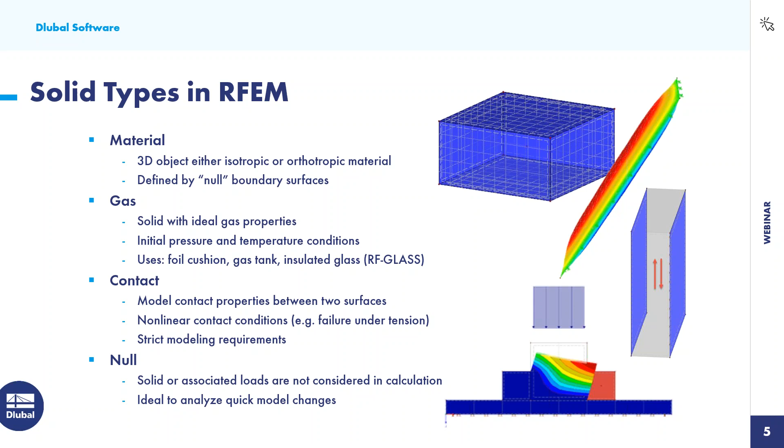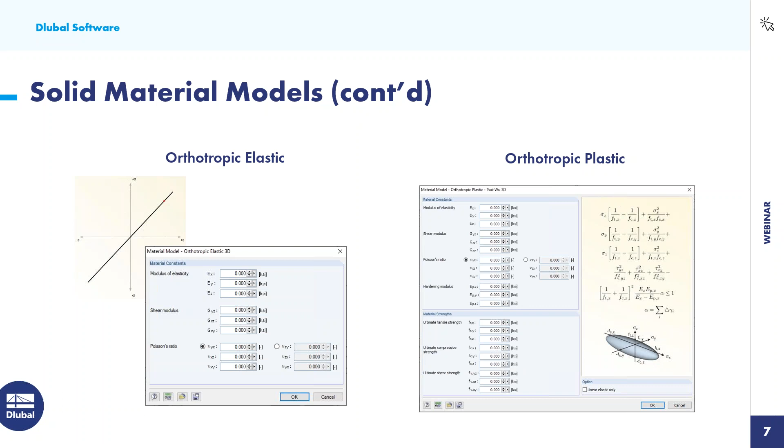Over on the right, we have orthotropic plastic. This utilizes the Tsai-Wu failure theory, and it allows for both plastic and orthotropic properties to be defined in three directions.

All right, so now that we have covered the different solid types and material models, I would like to get started with our first example here within RFEM.

You'll notice that I have a series of line and node elements here, and this model actually comes to us from the firm GP Joule Canada out of Toronto, and they use this type of connection here for their solar racking products. They have delivered me this file as an IGES.

So what I did under File Import, you can see here that we have many different file extensions that we can import directly into the model. We also have some direct interfaces with Tekla, Revit, AutoCAD. These are all default within the main program.

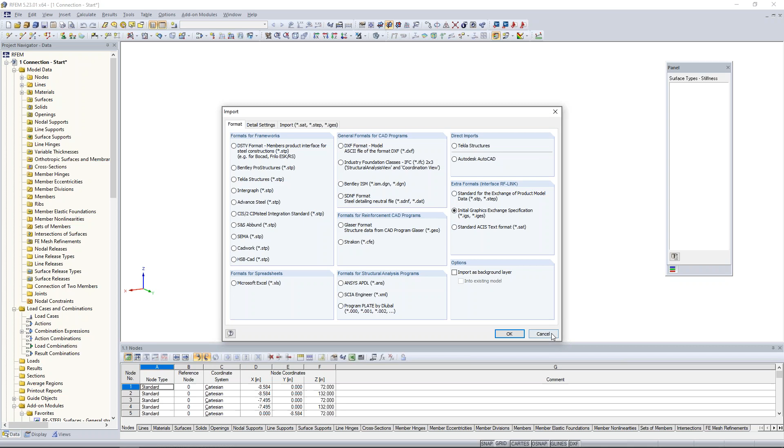If you are trying to import an STP file, a step file, or IGES, you will need to utilize the add-on module RF Link. So for today, we're importing this IGES. We'll use that RF Link, and essentially what will be brought in are a series of line and node elements to help us model these solid elements.

To begin with, we could probably agree that this is a little bit of an odd connection, not really found standard in a lot of connection design. So this might flag us that we'd want to do finite element analysis with solid elements to view the various stresses and deformations within this model.

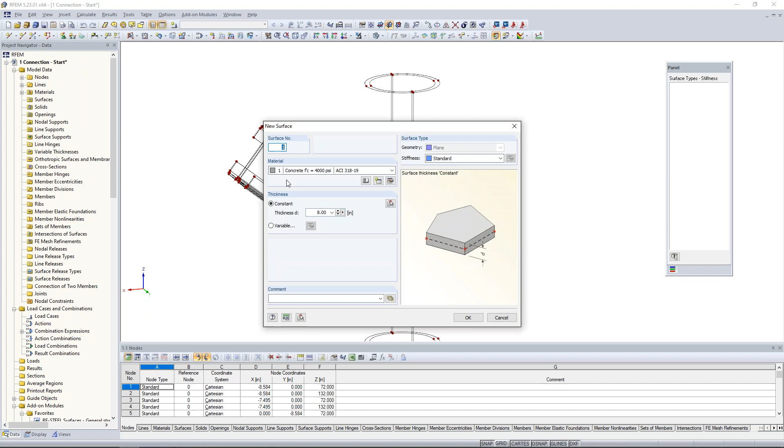So we'll begin by drawing our first solid here. We can see from these vertical lines as well as the circular lines at the top and the bottom that we want to begin with drawing our first pipe solid. I'll go up here to draw a new surface element, and all of these surfaces from this drop down allow us to draw a surface that's in a single plane. So we'll choose select boundary lines, and we're going to set the stiffness to null.

So if you remember back to the PowerPoint, these null surfaces will define essentially the geometry of what will eventually be a solid element. I click OK, and then I can zoom in here to the top of what will be my pipe element, and I'm just going to select these various line elements here to create my first null surfaces.

Now we'll do the exact same thing on the bottom. I'm just going to zoom in here and select all 4 line elements, and we'll do so on the other side as well. As far as the pipe walls, these are not in a single plane.

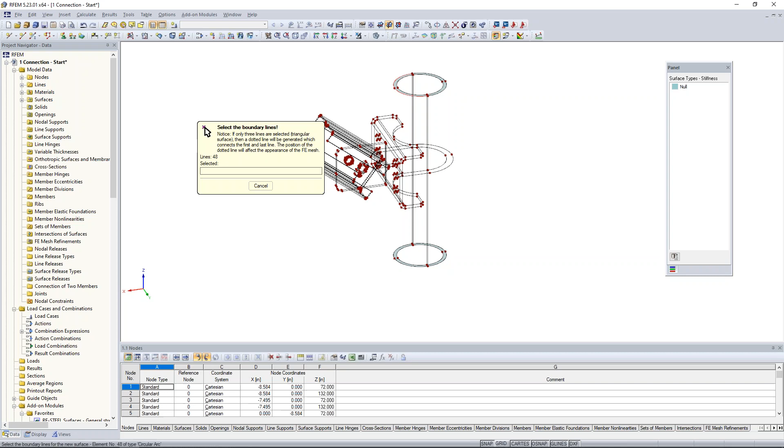So we cannot use this option here to just draw a simple surface, but rather we need to use this tool, a couple over, for a new quadrangle. Now again, the stiffness type is set to null, but this allows us to define surfaces that aren't necessarily in a single plane. So you can see here that I'm going to define my outer wall, and then I'm going to define my inner wall with these 4 simple lines.

Now I can take both of these surfaces here, select them, and utilize my mirror tool.

We can create a copy with the mirror tool. We would mirror about the ZY plane, and then I can simply select any point here within the model that I'd like to mirror about. The coordinates are automatically populated, and now we can see that all of our null surfaces are complete.

So we can define our first solid. Up here in the toolbar, I choose the option New Solid. The solid type will be set to material, so here are those 4 different types that we discussed in the PowerPoint. The material will be accessed from the material database.

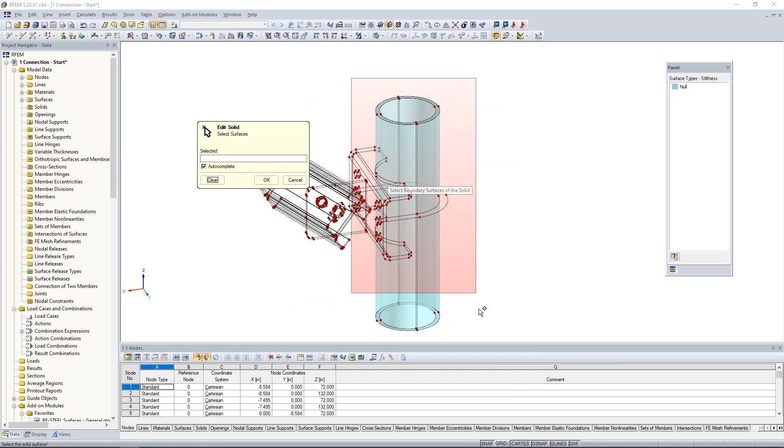I'm going to utilize my filters on the left to choose metal. We'll choose steel, we'll choose ASTM, and we can even take it a step further to choose AISC 360. From here, we would want to choose A53 grade B with the relevant material properties given to us. So I click OK, and then it's really just as easy as graphically selecting these boundary surfaces, surfaces 1 through 8.

Now the other two tabs here, the FE mesh tab allows us to define an FE mesh refinement. We'll actually do this a little bit later on, so we'll leave this unchecked for now. The axes tab will allow us to modify the local axes of the solid. We'll just leave this as the standard default.

So when I click OK, what we'll see here is our first solid has been defined, and we can select it right here in the center of all of these null surfaces. So that was a fairly easy solid to define, but what we would like to move on to is maybe a little bit more complex example.

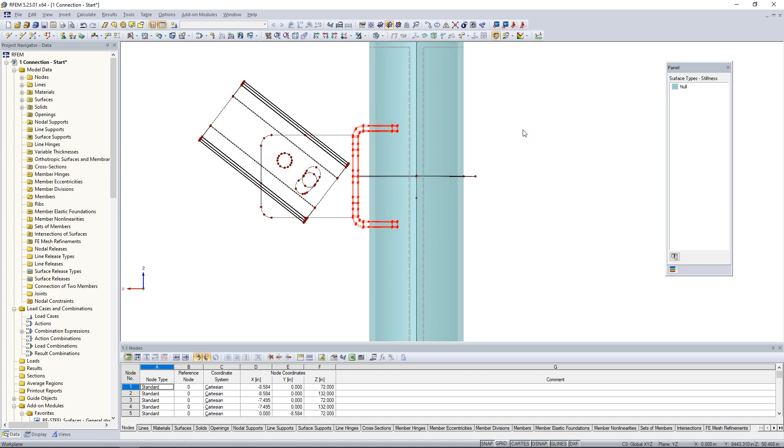So the second solid will be this plate that is essentially resting up against the face of this pipe element. I'm going to select all of my nodes and my lines, and we'll begin by generating those same null surfaces. I go to my surface option here to select the boundary lines. The stiffness is still set to null.

I click OK, and what this allows me to do is move around the model here in a circular fashion, and we can rotate the model to generate our first null surface. Now the exact same thing needs to be done for all of these smaller surfaces around the edge, so I'm just going to again move around in the circular direction.

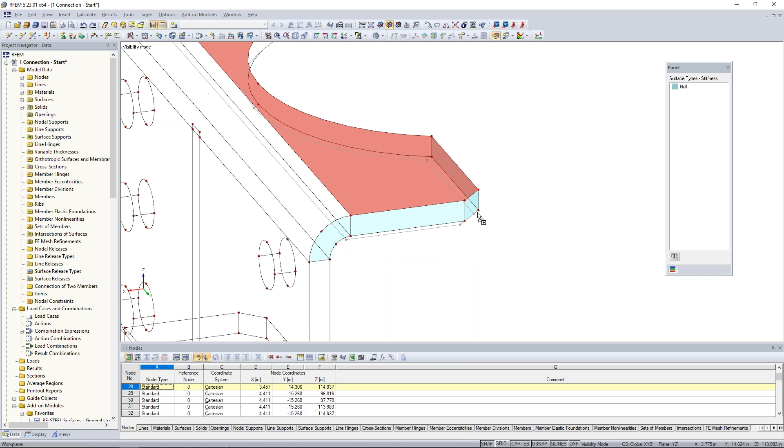And we are done. So this top surface, I need to copy it down to my bottom. I will highlight it, hold down my control key, and then I can drag and drop to make a copy. You can see I'm slightly off there, no worries, we'll hit undo. I can zoom in here, drag and drop, and let's try to snap that to this point again. So now we have that null surface shown on the bottom.

Now for these curved surfaces, we need to go back to that quadrangle option. So I'll choose the quadrangle option here within my toolbar, and then I can easily select the 4 lines to create that first curved surface.

And we're also going to do the same thing where our plate here transitions from these horizontal elements to the vertical elements, and we need to do so on the back side as well. So those null surfaces are now complete.

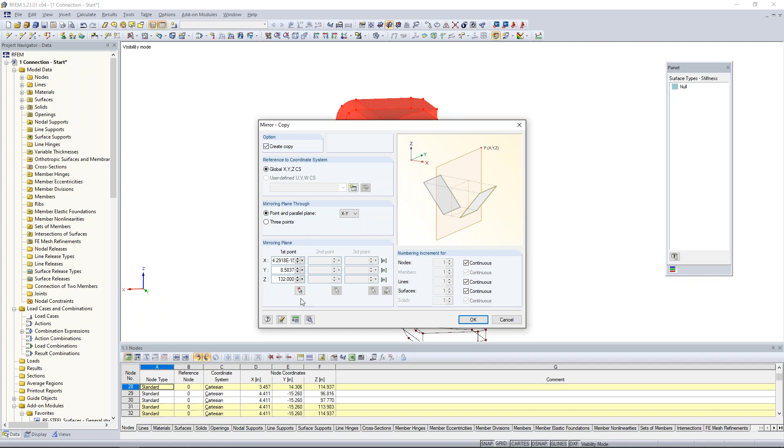Rather than doing that exact same process on the lower half, what I can do is select all of my elements here and once again utilize my mirror tool. We will mirror about the XY plane, create a copy, and then I can graphically select my mirroring point. You'll notice the program will snap to one of the midpoints of these vertical lines. So when I click OK, all of those null surfaces are shown at the bottom here as well.

So moving on to the center portion of our steel plate, we can utilize our surfaces in one plane once again, and this is easy enough to select this front face here of my plate element. But you'll also notice that we need to add in some openings, so before I do, let me just add in the side surfaces here.

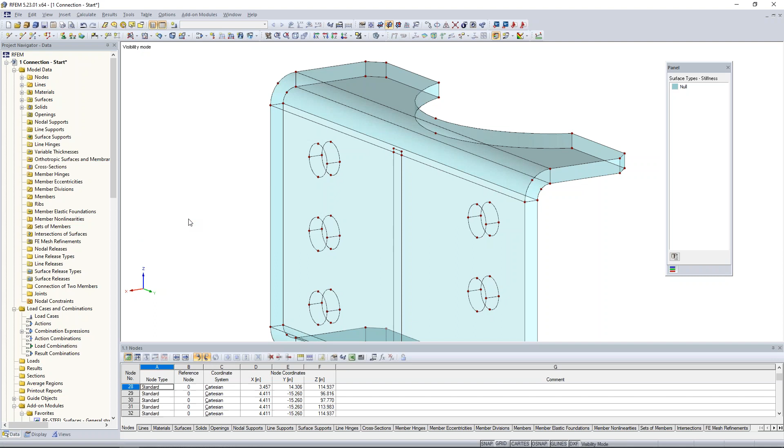To add these openings, we have the option right next to the surfaces to select the boundary lines for an opening. So I can easily just select these circular lines, and the program automatically detects that it should add an opening directly within this surface.

Once I have selected all 6 openings for my bolts, I'd like to copy this same surface and the openings to the other side. I'll highlight this surface, then hold down control, and also select all of the openings. Here we can easily hold down control, drag and drop to make a copy on the back side as well. Now you'll notice those openings are also on the back of the plate.

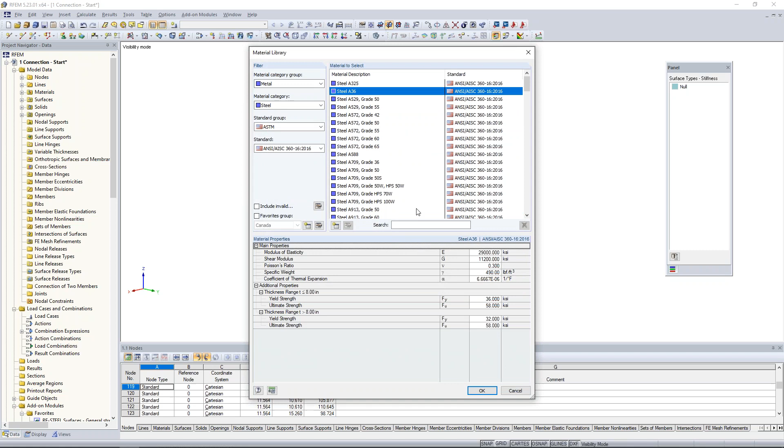Realistically, we think we should be ready to create that second solid. I'm going to go up here, just like the pipe, to create a new solid. The solid type will be set to material, but let's define a new material from our database, and this time we will utilize steel A36. I click OK, and now I choose my boundary surfaces.

What you'll notice when I click OK is the program automatically gives me a warning saying the surface boundary is not closed at these particular edges. These are all specific lines. The problem is that we defined these openings, but we didn't close the surfaces here on the interior of the openings, so this requires a new quadrangle surface. We click OK, and we actually need to apply these surfaces on the interior here.

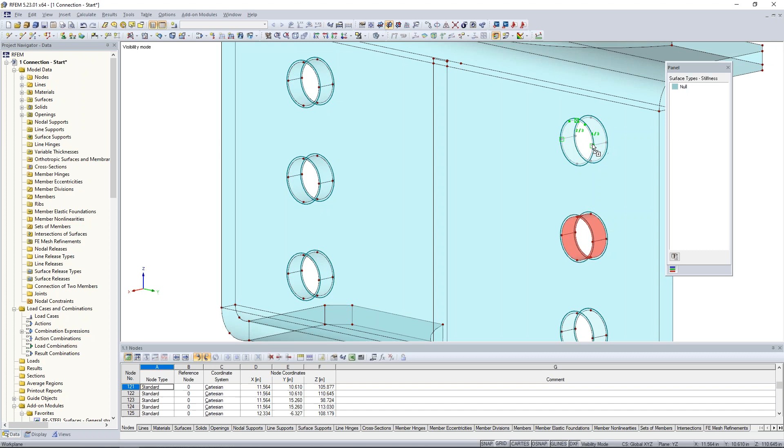Once I apply these 2 surfaces, what you'll notice is I have these 2 additional surfaces. I can hold down control and drag and drop to these additional openings, doing so on the other side, making sure that our snap points align. Finally, we have one more opening to add here.

The other thing I'm going to do quickly is utilize this tool up here in my toolbar - it's the connect lines or members. All that this does is recognize where lines and nodes are connecting, and we'll go ahead and create an intersecting node there. So let's try and create our solid again.

Solid type material - I'm going to select the steel A36 that I've already defined, and let's select all of our null surfaces here, and I can click OK. Now you can see that solid was generated just fine once we closed those boundaries, and we have an additional solid shown here.

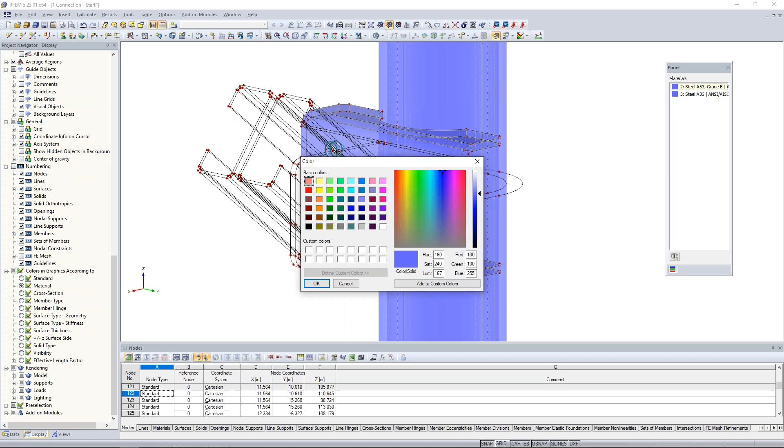So we can cancel this visibility here, and let's take a look at the display of our model according to the material. I'm going to change the color of steel A53 here to a green color so we can see the difference. Now, here's the problem if we were to continue modeling the rest of our solids and eventually run an analysis: if this plate was to press onto this pipe in compression, the plate will actually just pass right through the pipe. The program doesn't detect that these 2 elements are connected, and the reason why is because they do not have a commonly shared surface.

So what can we do about this? I think we can agree the commonly shared surface should be this curved surface here that we created that's a part of our plate. The reason why the pipe currently does not detect it is just because we need to integrate that surface directly within the solid itself.

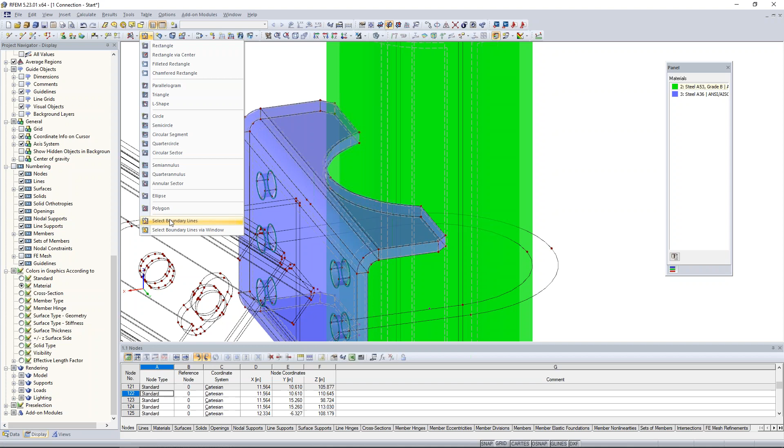So I'll begin by drawing a new opening by selecting the boundary lines. Let me turn this into a wireframe view, and I'm going to select the 4 lines here. I now have an opening symbol shown. Now this surface still exists in the interior of this plate element.

So we'll take this a step further - we'd like to double click, and actually let me back up a step. We'd like to double click on the null surface. Remember, this is part of the pipe here. It might be a little bit easier to see when we are in a rendered view. We'll change this back to a wireframe view.

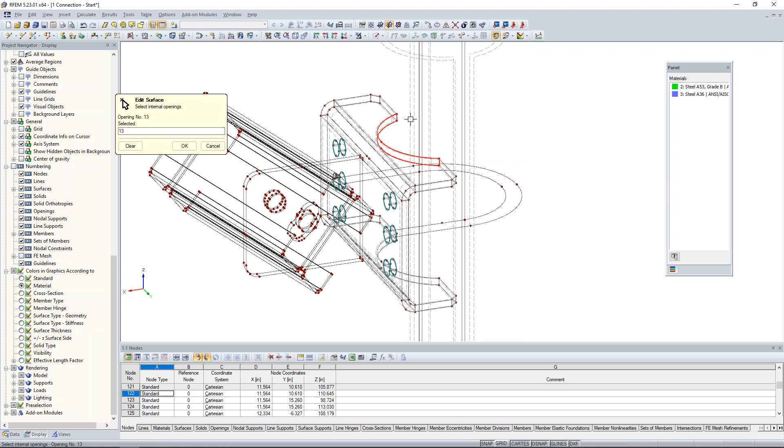I'm going to double click on this null surface of the pipe, and under the integrated tab, I need to select this opening and tell the program to integrate this opening directly within this pipe. So we've done that with opening number 13. Then I'm going to double click on my pipe solid here, and under the boundary surfaces, I want to select that commonly shared curved surface between the plate and the pipe element. Surface number 19 is now listed, so I can click OK.

So now we have integrated that surface, this curved surface here, between both the pipe element and the plate element. So now when they bear on each other, the program will recognize that they're actually connected.

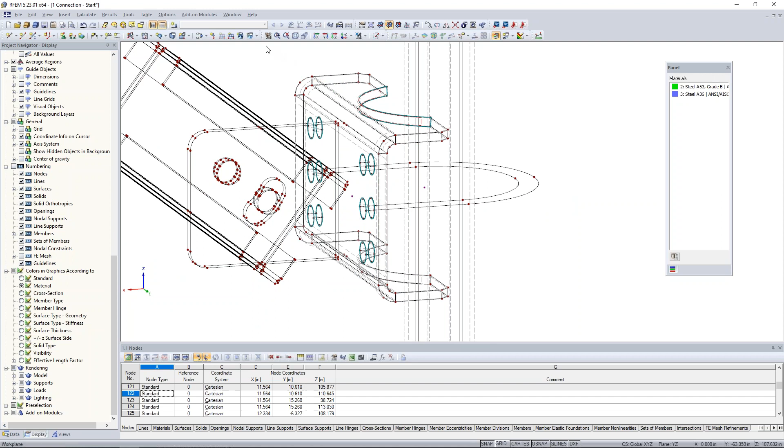So we'd also want to do the same thing at the bottom here, and we'd want to continue on drawing all the rest of our solids.

So for the sake of time, you'll notice here that I have continued on with the rest of the model, and I've added in that opening down here at the bottom and integrated that surface to the pipe as well.

But we can also access a list of our solids under the Data tab within our Project Navigator. And you'll notice that I have additional solids now drawn for this U-shaped rod that's essentially tying this plate element around my pipe.

We also have, of course, the pipe element. We have the plate that we just created.

Then we have some additional solids, including a solid defined for our bolt on the left. We have maybe a bolt on the right.

And then we have some additional solids for the bolts connecting our double channel here to this yellow plate. And eventually this yellow plate connects back to this initial solid that we had just created.

So you'll also see that we have solids defined for these channel sections. This is a double channel. It's representing our diagonal brace in this connection.

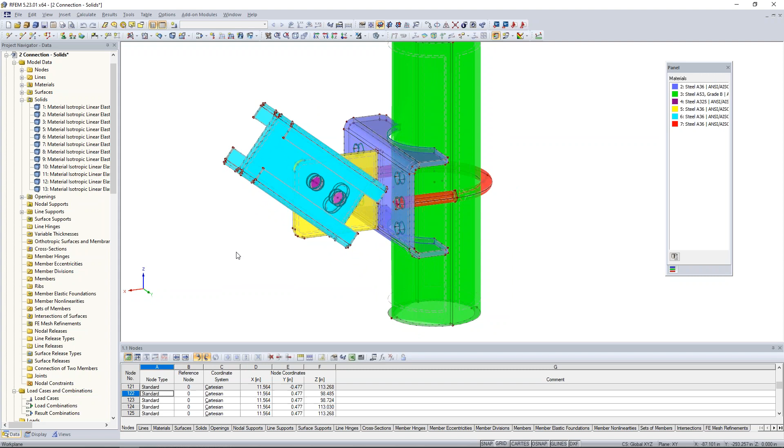So before we're ready to run an analysis, of course, we need to load the structure and we need to support it. So let's begin by supporting it with new line supports.

I'm going to access a new line support, and we have a couple default options, both hinged and rigid. We can always create a new line support, and this allows us to define any of the 6 degrees of freedom here as fully fixed, fully released. Of course, we have partial fixity and nonlinear options.

I'm just going to choose the default hinged option. I click OK, and we will just select the top and bottom of the pipe element here. So now we have a line support at both the interior and the exterior of this pipe.

So it's now supported. We'd like to move on to loading.

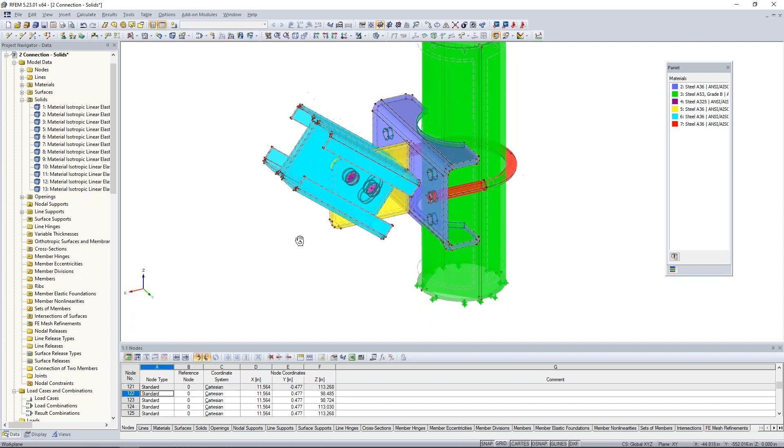And with the loading, we probably want to represent some type of load on this diagonal brace. And it's most likely easiest to just simply apply a nodal load. But the problem is that we have all of these surfaces here, these null surfaces.

We'd like a point load to really distribute it evenly across this entire face. So how do we do that?

Well, I'm going to select all of these surfaces down here at the end, and I'll create a visibility by the selected objects. Right now, all of these surfaces, if we were to highlight them, and we can right-click to edit the surface.

We're actually going to change these from null to rigid stiffness. So a very, very high stiffness, so that eventually when we apply a single point load, then that will be distributed evenly across these entire faces. So I click OK here.

But we need to take this a little bit further and actually connect these two faces here as well. So I'll draw an additional rigid surface element between these two channel sections.

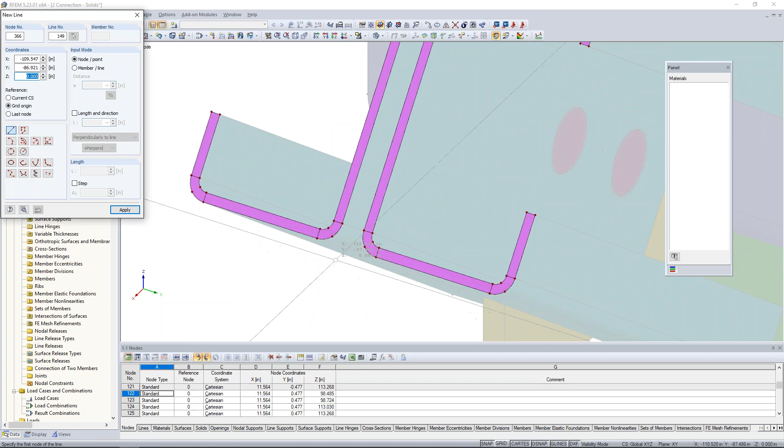I'm going to use a new line element, and I'm going to zoom in here to select my point on the left and my point on the right. We're also going to do the same thing up here at the top.

I'm going to select my point on the left and my point on the right. I'm going to utilize this connect lines or members tool once again, just so the program detects where these lines are intersecting these additional surfaces.

And we once again draw a new surface by selecting the boundary lines, but this time the stiffness will be set to rigid instead of null. And I'm just going to move around here by selecting these various nodes that make up the boundaries of this rigid surface.

So here we are, rigid surfaces connecting both of these channel sections. Now I'd like to create a node right here in the center.

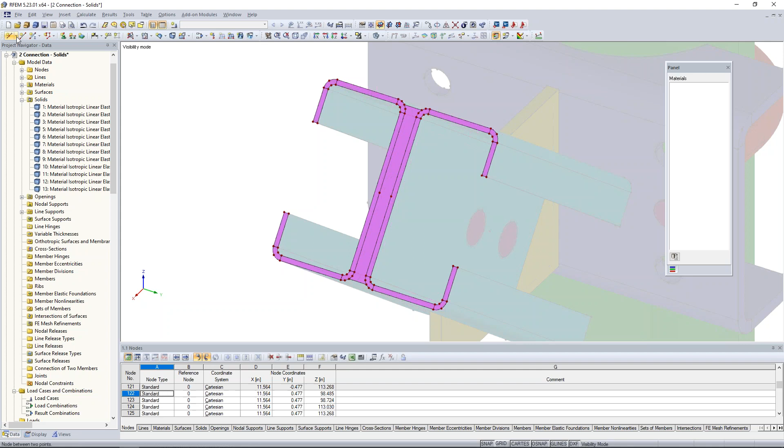So I can go up to my toolbar, and instead of just drawing a new node, we have the ability to draw a node between 2 points. So I can select my point on the left, my point on the right, and automatically the program will place a center point here. This is going to be the node that we want to use to load this entire connection.

So before applying a nodal load, we want to generate some various load cases. I use this option here to create a new load case. The first load case description is going to be up.

And we're going to place a load that's completely in the vertical direction. Self-weight is activated here. I'm going to make a copy of this, and today I'm just going to be utilizing load cases rather than load combinations. So therefore, I'll activate self-weight here because I'm not combining any of these loads, I'm actually running them separately. And we'll create one more copy, and we'll call this one a tension load.

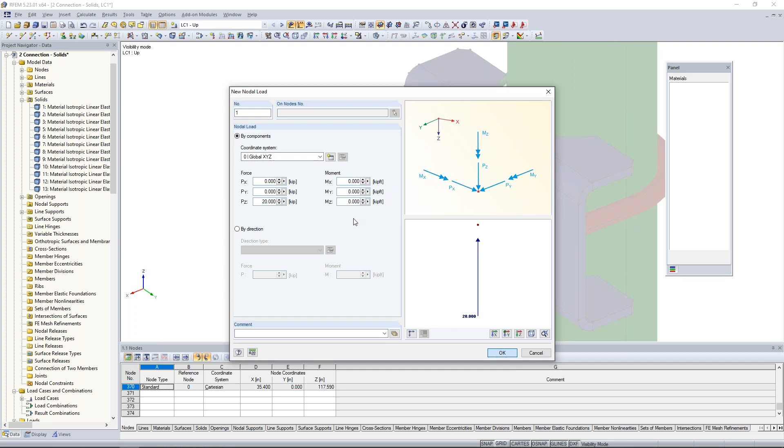I click OK. So now that we have our load cases defined, I'm going to choose the up direction here. I'm going to apply a new nodal load. Within this dialog box, I'm going to select the magnitude and enter this in as 20 kips in the vertical global Z direction. I click OK, and then I can just simply zoom in here and select the single node. So now we can see our upward load shown here.

Exact same process for down. I'm going to apply a new nodal load. The only thing that I want to modify here is instead of using a positive 20, we will apply a negative 20 kips. So just adding a negative sign in front of that, we select that center node, and now we have a downward load.

So for this last load case, this tension load, and this is probably the most realistic load, we'd like to apply some type of tension load along the same orientation as this diagonal brace. So when we go to draw a new load, we might be thinking, okay, we must have to break down this diagonal load here into horizontal and vertical components.

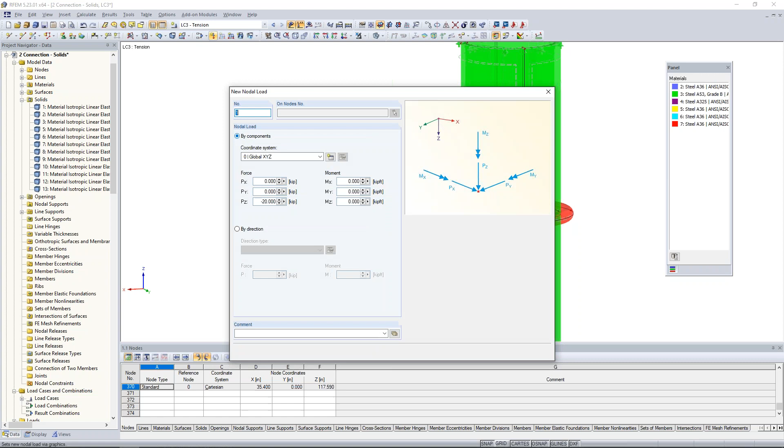But we have a nice feature within the program that allows us to define it by direction. So I can go into the detail settings here, and I can actually define this load in the same orientation that a line is defined as by selecting it graphically within the model. So I can graphically choose any one of these arbitrary lines that are in the same direction as my member, line 324. I click OK.

I set the magnitude here to be negative 40 kips. I click OK, and then I'm going to scroll in here, select that center node again, and now you'll notice that we have this diagonal load defined along the length of the diagonal brace. We didn't have to break it up into the horizontal and vertical components.

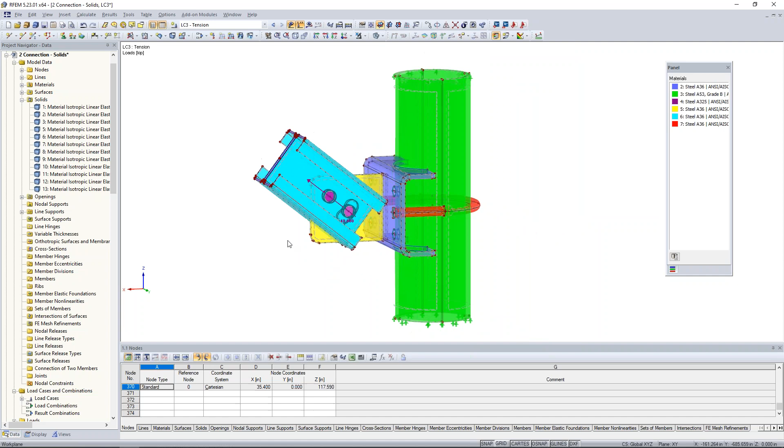Okay, so we are almost ready to run our calculation. The final thing to discuss is the FE mesh. Under Calculate FE Mesh settings, the default typically for a new model for a global mesh will be 1 foot. Instead, this is entirely too big for this type of smaller scale model.

So we'd like to change this to 1 inch, and we can select this option here to regenerate the FE mesh when we click OK. So we can see down here in the lower left-hand corner, the program's kind of thinking through to generate this FE mesh at a 1 inch length.

So once this is completed, the program will go ahead and exit out of this dialog box, and we can generate, or we can turn on the FE mesh under our display tab here. Let's turn this to wireframe view, and you'll notice that the program has automatically generated this FE mesh, tying all of our nodes, our line elements together, the solids. We don't need to take care of anything manually.

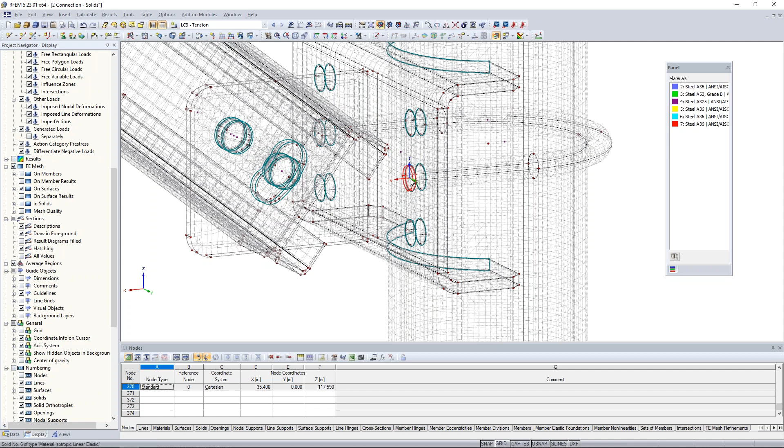Let me take a look at one of these smaller bolt solids, for example, and I'll create a visibility by the selected objects. One thing that I'd like to note when we're zooming in here is that there's actually only 2 FE mesh elements across the entire length. And if we're truly interested in the stresses in our bolt elements, we probably want to refine this mesh quite a bit. So what I'll do here is cancel my visibility mode, and holding down my control key, what I can do here is select all of these smaller solid elements.

I'll set my visibility by the selected objects. We can right click to edit the solid, and we'll revisit this FE mesh tab where we can create an FE mesh refinement. A refinement will allow me to define something smaller here than the 1 inch global setting, 0.3 inches for the entire solid.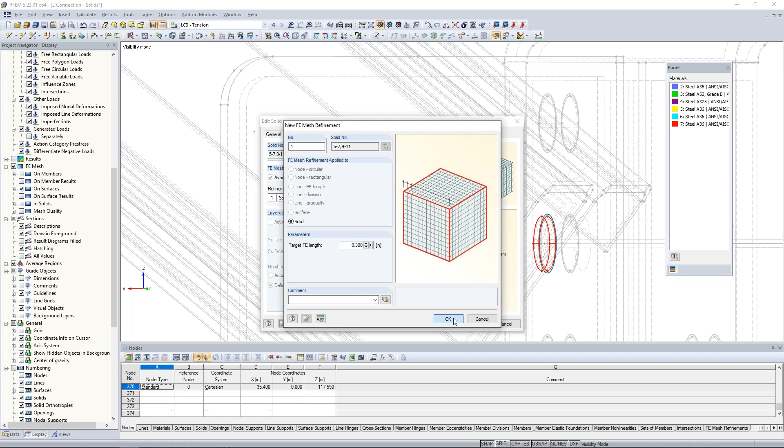In addition to these smaller elements, you can see the FE mesh refinement shown here with this cube type symbol. If I cancel my visibility mode and look back at my pipe element, we can also use FE mesh refinements for larger FE mesh lengths as well. It doesn't necessarily have to refine it into something smaller.

So for this pipe element, I'd actually like to set the target FE length to something like 1.6. This way I'm decreasing my number of mesh elements, which might decrease my solution time as well without compromising my results.

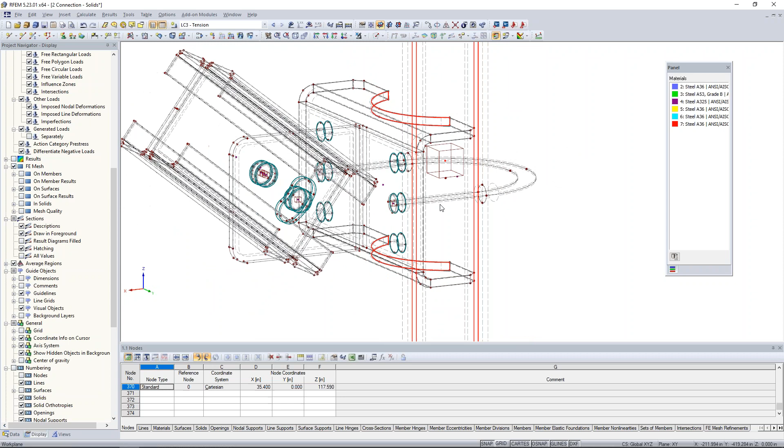If we go to calculate, generate FE mesh, the program will automatically generate this FE mesh again, but taking into consideration these FE mesh refinements. It will take just a split second longer because we have defined some smaller FE mesh elements for our bolts, but everything will still tie back into this 1-inch setting.

So here we are with the final FE mesh. We can scroll into these bolts and see there's definitely a smaller length defined. Our pipe has a slightly larger length defined.

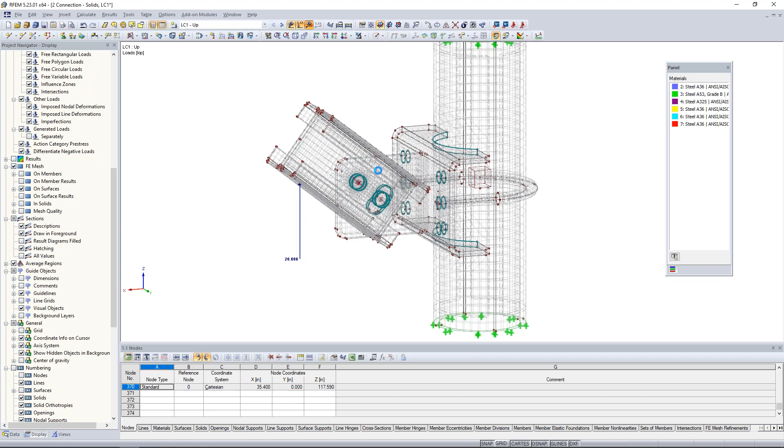So now we are finally ready to run our first load case, and we're actually going to run the load case in the upward direction here. The program gives me a quick warning saying, hey, you have a lot of FE mesh elements, do you want to change the solver to iterative? I'm actually going to select no with that. This isn't a huge model, so we can keep the default solver as it is.

Now, for this particular load case, everything is linear. Even the load case itself is a linear analysis first order, so it should solve rather quickly here and will eventually be presented with our results graphically within RFEM. Also, no material nonlinearity shown yet. We'll get into all of those in just a minute.

Now the calculation is finished, and we will be presented with our results here in our project navigator. We're currently viewing the global deformations, and exactly as we would expect, we have our deformation shown here in the upward direction. Sure enough, our braces are deflecting in the vertical direction.

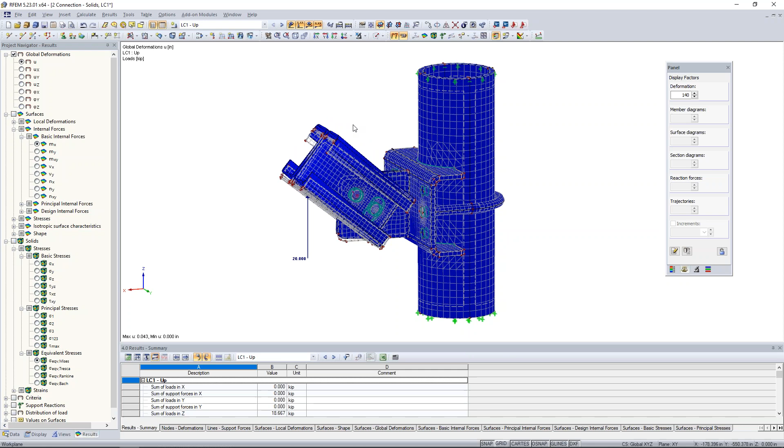But this isn't actually the focus of why I created these upward loads. I'd rather like to take a look at these elements here, my solids of the plate bearing against the pipe element, as well as the steel rod kind of encompassing the pipe.

So I'm going to create a visibility by the selected objects, and I'm going to right click here to turn off the hidden objects in the background. What I'd like to do is to still view the global deformation, so I'm going to really increase my deformation factor here.

So obviously we have tension on this plate. And because everything is fully connected here, you'll see this pipe element deformation following along with that plate. Everything is fully fixed. But in reality, we know that this plate is not going to be welded to this pipe. It's actually just sitting there.

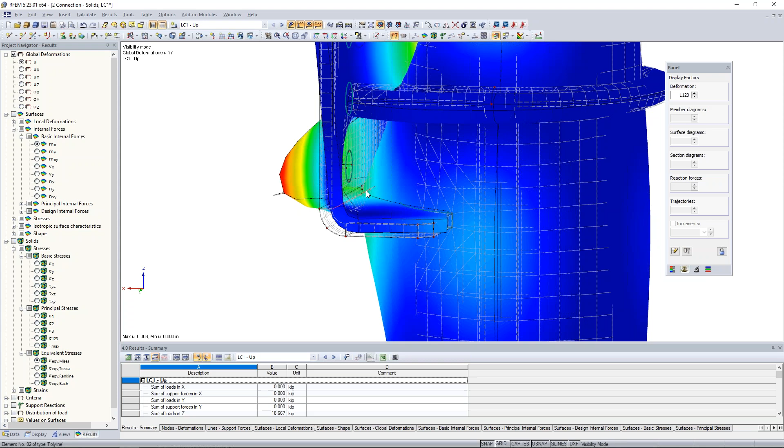So in the event of tension, we'd actually like the full force transmission here to be released. We want this to be a failure between these two elements. But in turn, if we look at the top of the element here where we have compression, we certainly want these two elements to bear on one another. We'd like the deflection to kind of follow along with the pipe along with the steel plate.

So the question is, how do we define such a nonlinearity such as this? And the answer is with what's called a surface release. So what I'm going to do is turn off my results, and under the project navigator, we'll find a new surface release here where we can right click to create a new surface release.

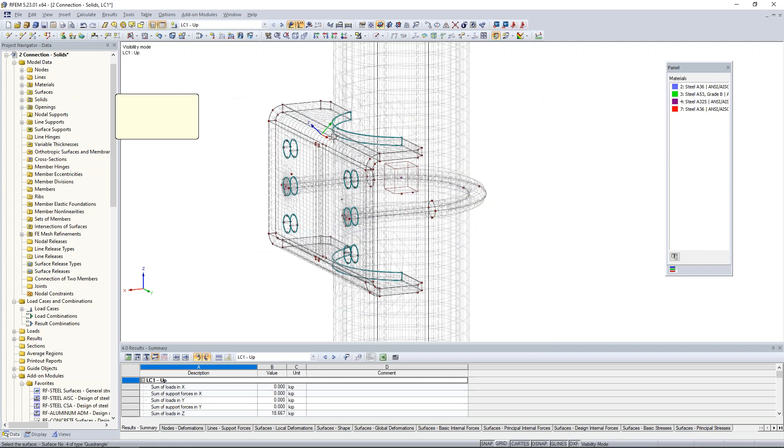The surface we're going to use to generate this nonlinearity is that commonly shared curved surface that these two elements share, shown here as surface number 15 in the background. We need to create a new surface release type.

I'll create a new type here, and we're going to release the translation in the local z direction of this surface, normal to its face. With a surface release, the program generates a duplicate identical surface, and the settings we set determine whether we release the relationship between these surfaces or have full force transmission. In our case, in tension we want it to fail, but in compression we want these two surfaces to bear on one another.

So we set this to fixed if positive PZ, click OK, and release solid number 2. I can graphically select this solid here within my model — this is my pipe, solid number 2. I click OK, the program asks me to clear my results, and now we have this surface release symbol shown graphically within the model.

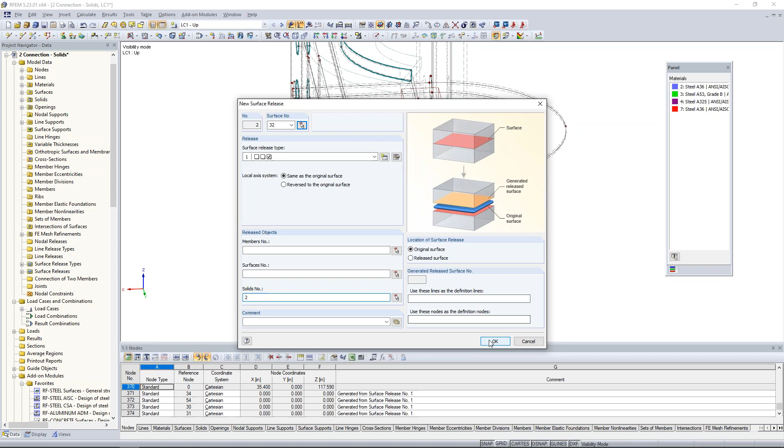The exact same thing needs to be done at the bottom as well, otherwise we have a fully fixed connection. I right click on surface release to create a new one, graphically select this surface down here, surface number 32. I don't need to redefine the type since we already defined it — I select it from the drop-down box and type in number 2 to release my solid from that surface, then click OK. Now that additional surface release symbol is shown at the bottom as well.

Now it's interesting to look at this line element. If we turn this back to a rendered view, this circular solid rod encompassing the pipe isn't necessarily a fully fixed connection — maybe we want to define some friction behavior between the pipe element and the rod. So I'll create a visibility by selected objects and show hidden objects in the background so we can see where we're at. This line element is shared between this solid rod and this surface, the null surface.

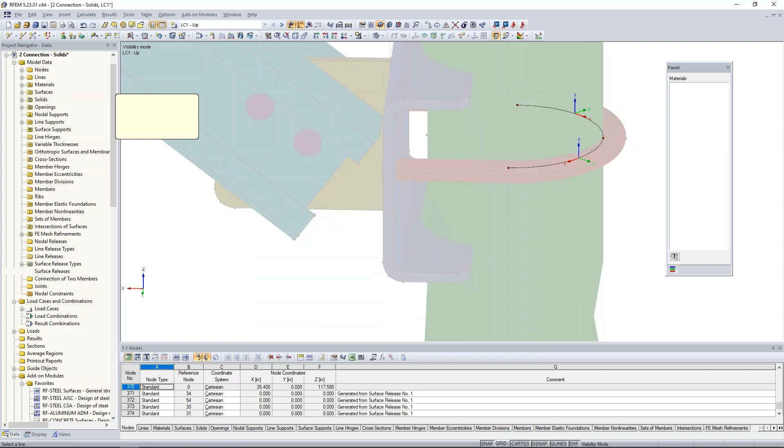I right click to turn on the local axis system of this line. Just like a surface release, we also have the option to add a new line release from the project navigator — same concept. We select the line graphically, line number 3, and need to create a new line release type. The program creates a duplicate identical line, and we just need to define the nonlinear behavior — for this option I'm going to release all of my degrees of freedom.

Notice we have an additional degree of freedom for rotation about the line here. Under nonlinearities for the local z direction of the line, which is the vertical direction here, I'm going to set the nonlinearity to friction according to Vy. This means it will take into account the shear force in the y direction, essentially the normal force pushing this rod into the pipe.

With this relationship we can set a spring constant — we'll set this pretty high, 10e6. We also define a friction coefficient between the two elements at 0.8. So the higher the shear force, or normal force acting on this line, the stronger the connection between these two solid elements. If we decrease that shear force, we'll see less connection, and maybe the rod will slip around the pipe.

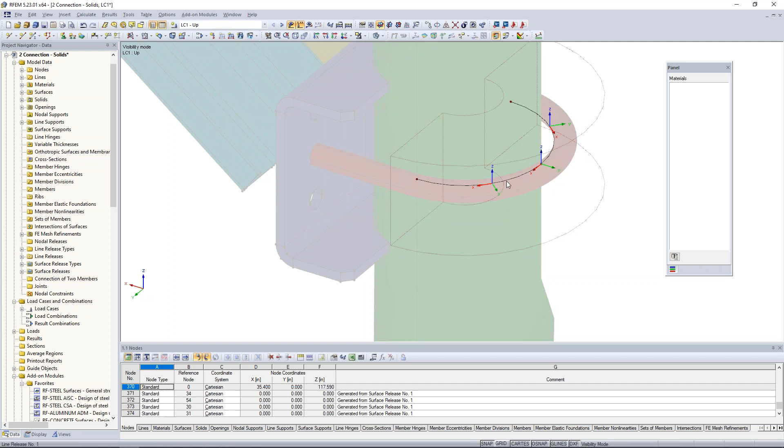Now that we've defined the line release type, we want to release solid number 2. I click OK, and now we have this line release symbol shown graphically, just like with the surface releases.

Canceling this visibility mode, we'd now like to rerun this same model in the upward direction accounting for these nonlinearities. For the sake of time, I've already run all 3 load cases and have the results so we can view the deformation. I'll begin with the overall deformation of the structure under this upward load — exactly as expected, these braces are deflecting in the vertical direction.

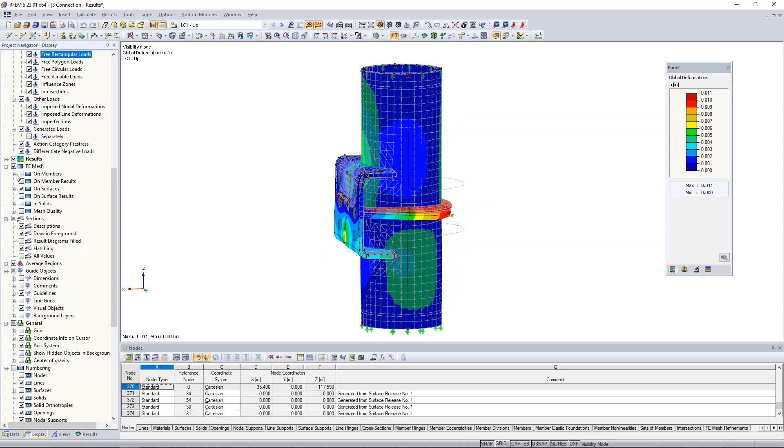But again, probably what we're a little bit more interested in is all of this behavior that we have just redefined over on the right-hand side. So what I will do here is to select these elements and create a visibility by the selected objects. Under the display tab, I'm going to turn off my FE mesh. I'm also going to completely turn off the underlying model, so I'm only viewing the deflected shape. With the upward direction, I'm going to increase my deformation.

And now you can see that as this plate pulls away from the pipe, we actually have a gap here in between those two elements. That's because that relationship has failed in tension for that commonly shared surface. But up here at the top, we see that the plate is bearing into the pipe element and they're both deflecting together because we have compression. So that's exactly what we'd like to see.

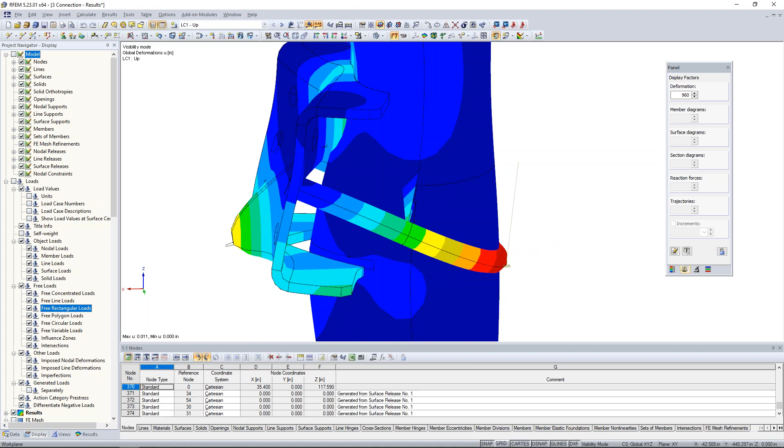You'll also notice my rod is slipping down ever so slightly due to that friction behavior we have defined for that line release. Now my factor is pretty large here. The rod is actually slipping down 0.01 inches, so it's nothing to be really too concerned about.

If we take a look at the down position, let's take a look at here. Remember, this load is acting down on the braces, and I can quickly cancel my visibility mode, and we can see the downward load here. Of course, our brace is deflecting in the downward direction.

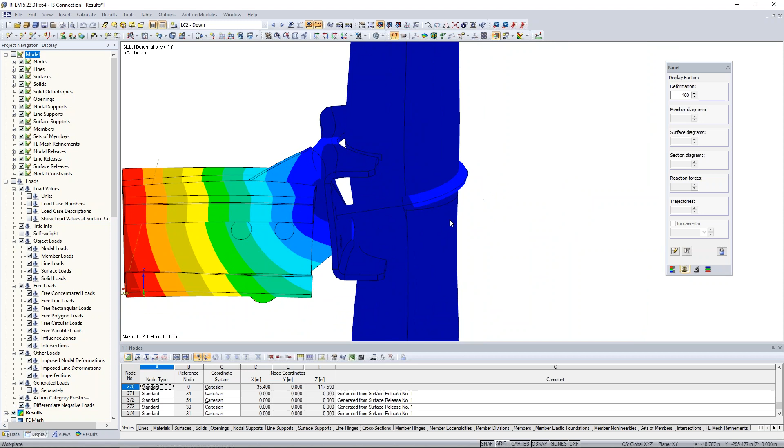So again, let's take a look at the deformation factor. And you can see this plate pulling away from this pipe here with a small gap in between it. We also will see this rod kind of slipping up here as well. So this is exactly the behavior that we'd like to see defined.

And of course, we can take a look at our tension case here. If I cancel the visibility, and actually let me turn back on my model. If you remember, we just have this load being applied right along the same orientation as the members. So taking a look here at the results and the deformation, I'd like to just show you guys once again what's kind of happening with our relationship here with these elements.

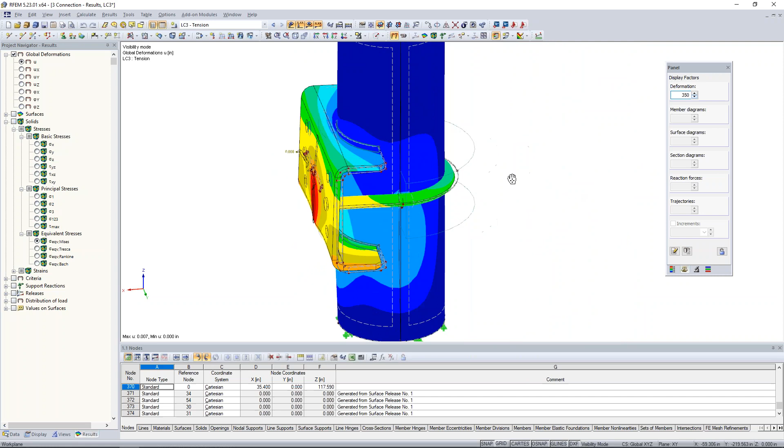You can see that when we turn this into a wireframe view and we increase our deformation here, once again we have this element, the plate element, kind of pulling away from this pipe. So everything has been correctly defined with these deformations exactly as we would expect. Definitely the behavior that we'd like to see.

Okay, so moving on, of course the deformation is important just to make sure that the modeling is acting exactly as we would expect. But we're also interested in information on this model, such as stresses. So for this, I can activate some of my stresses here, such as the normal stresses on my model, in both the X and Y directions as well as the Z direction, because remember, these are three-dimensional elements now.

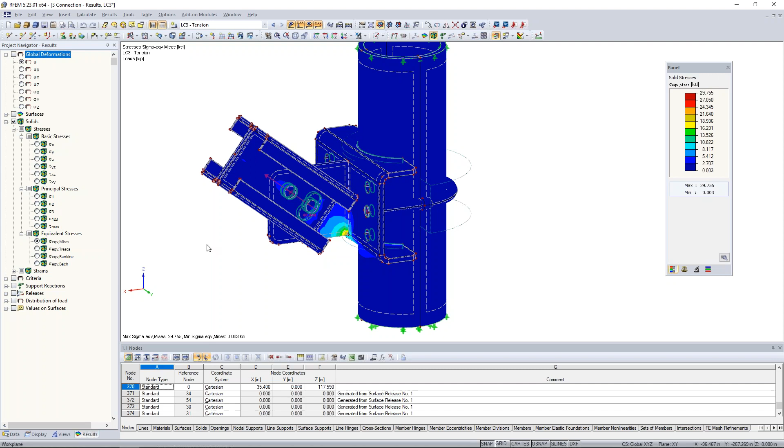We can view the shear stresses according to these color panels here. We're probably most interested in the von Mises stresses, so we can activate those and take a view at maybe one of these other load cases just to view where maybe the hot spots are in this downward load case. Well, we sure have some high stresses here.

Now, a quick tip when we're looking at stresses on a much smaller scale here for something like a connection: you can see the equivalent von Mises stresses are shown at 42 KSI. Under the display tab, what I'd like to do is activate the FE mesh and take note that under the results here, we have the solids tree. The default here is to show the colored contours continuous within the solid. So what this means is the program is going to create a smoothing algorithm to tie all the values of our FE mesh points together so that we get a nice pretty picture of these various contours.

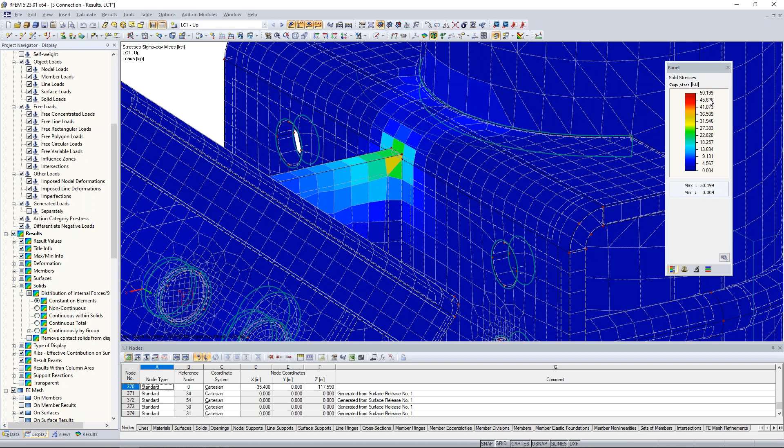The better option when we're viewing stresses on such a small scale is constant on elements. So now you'll notice that every FE mesh element has a specific color. It's no longer trying to tie those all together between each FE mesh element within a single solid. My solid stress has actually jumped up to 50.19 KSI. So this is the more accurate way to view these stresses rather than using that smoothing algorithm.

Well, with von Mises stresses this high, I think this would immediately flag us that we probably need to run some type of plastic analysis. Remember, the material for these two plates is A36, so our yield strength is only 36 KSI, yet we have stresses clear up to almost 50.2 KSI. So what we'd like to do now is take advantage of one of those nonlinear material models that we discussed back in the PowerPoint.

Under the Data tab, we can see all of our materials listed within this tree. The first is the steel A36 from that initial solid we defined at the beginning of the presentation. If I double click on this material, you can see the material model by default is set to linear elastic. This is where we're going to change it to an isotropic plastic 3D.

These various material models for the nonlinear options are available with RFEM—it simply releases these material models into this main program. Now you can see the yield strength by default is set to 36 KSI from our A36 material, based on the von Mises strain hypothesis.

So we click OK through these dialog boxes. The program tells me it needs to clear out the results. That's okay. Now we probably also need to change the material for our additional plate here.

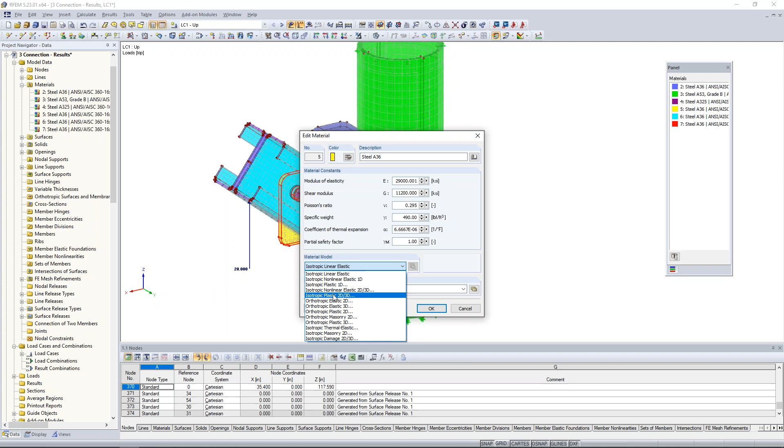These were both experiencing very high stresses, so I'm going to double click on this material, again steel A36, and modify it to the plastic 3D option available here. Yield strength is set to 36 KSI, exactly as we would expect.

I click OK. Now, realistically, we could change the rest of these materials to a nonlinear material model as well, but the high stresses are really in these two elements, so I'd expect to see better load distribution even with just changing these two elements alone.

So now we'd like to rerun our calculation. Since we're introducing another nonlinearity, the program takes just a minute to run. So we will jump over to an already saved model with the results for us. When we run this model according to the nonlinear material, with these nonlinearities defined with the line and surface releases, I want to take a look at my equivalent stresses here again for von Mises.

I scroll into these particular areas that I was most concerned about, and I now look at my max solid stress of 34.77 KSI. So this is exactly what we would expect.

We would never want to see with a nonlinear material model anything higher than the yield stress, because what will happen is the load is introduced to these finite element mesh points. If any of them are experiencing stresses higher than the yield strength, the program reduces the modulus of elasticity, distributes the load to the adjacent FE mesh elements, and the calculation is rerun until the load has been fully distributed within the model.

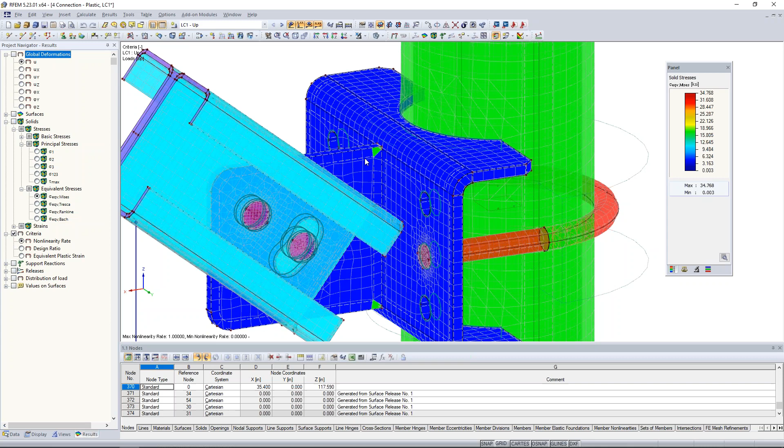So what we're finding here are a few of these elements that have probably yielded. To tell if the elements have fully yielded, we can jump to this criteria section here. Turning this back to a wireframe view, the criteria will show us which FE mesh elements have fully yielded or have come very, very close to it.

With these solid elements, you'll notice it's a little bit difficult to tell what's going on in the interior, because they're three-dimensional, unlike our surfaces or members. So what I'd suggest when looking at these results is to take advantage of what's called a clipping plane.

Under Insert, we can activate this clipping plane, and it's exactly as it sounds—it makes a slice right through the center of our model. So we're actually viewing the results right through the center of this plate element, which gives us a better idea of which elements may be a concern through the depth of this solid.

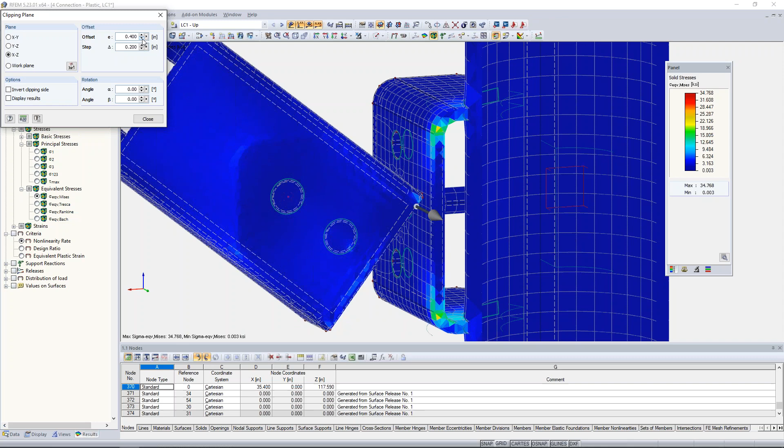We can set our step here to something like 0.2 inches, then use our scroll offset options to scroll through the various views of these solid elements. I can scroll back to travel through the depths of this plate element. We also have the ability to change the plane, so I can change this to YZ—now you'll notice I slice through the center of this model.

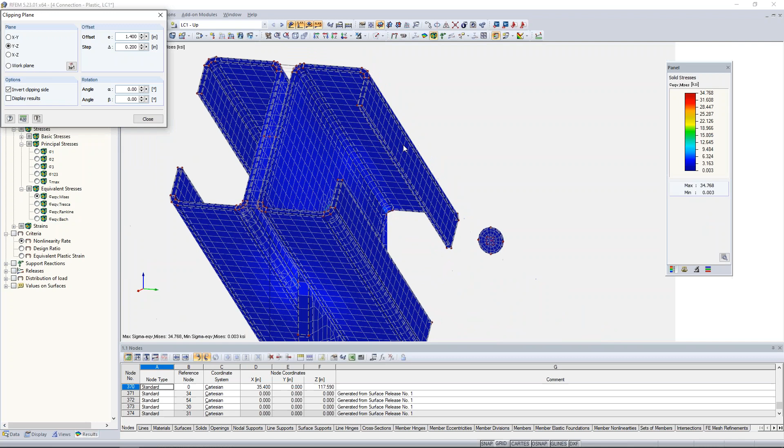I can use this scroll wheel to travel into the depth of where these two solids connect. This gives us a better idea, using the nonlinearity criteria, of which elements have fully yielded. As we get closer to our initial plate, we'll see some of those yielded elements. We also have the ability to quickly invert the clipping plane, so when I choose this option, I'm now looking at the other side of the model, and we can travel through there with these offset options. That clipping plane can be extremely beneficial when utilizing 3D solids, since it can be a little more difficult to see.

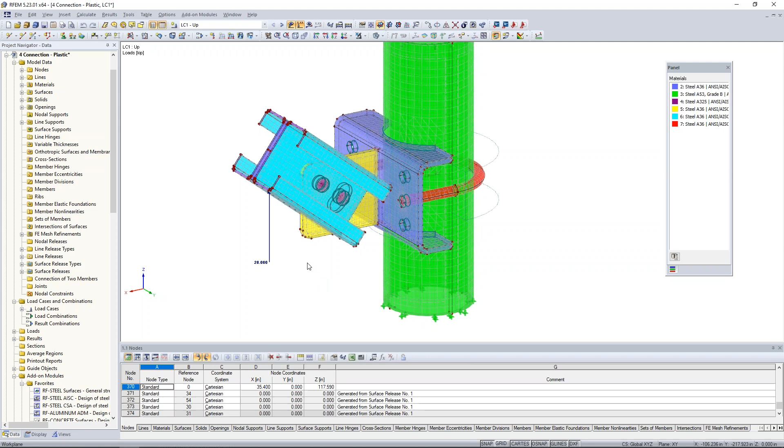We've covered quite a bit in terms of these material solid nonlinearities. The next thing I'd like to show you is how to activate a null solid. We might use a null solid for this connection if we're told that this diagonal brace isn't going to be a double channel section, but rather just a single channel. We'd like to get rid of one of these channel elements completely. We could delete the geometry, but instead I'll double click on my right solid and change the solid type to null. I click OK to clear our results, and you'll notice the program automatically changes the color to red. That means this channel was completely taken out of the model, and all associated loads will also be removed for our next calculation.

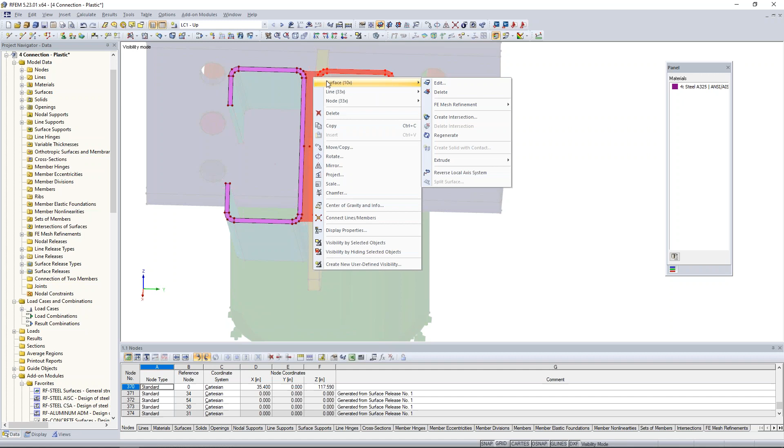Before we run that calculation, we need to modify what's going on at the front, because we created rigid surfaces to distribute the load evenly. I'll create a visibility by the selected objects. My rigid surfaces on the right weren't automatically changed to null surfaces, so we can select them all with our selection tool, right click to edit the surface, and similarly to the solid, change these rigid surfaces to null. I click OK, and now all of these surfaces and this solid on the right have been completely deactivated.

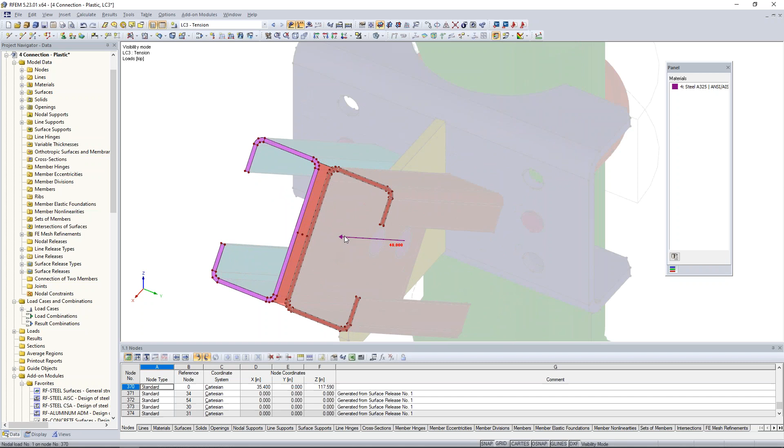The final thing to do is modify where we're applying this load. Currently it's applied to a node that's no longer active on that surface, so let's take this load and simply drag and drop it. Let me zoom in closer - we'll take this load and drag it onto this node on the left, so now it will be evenly distributed to the face of this channel section shown on the left. Same thing for the downward load - I'll zoom in, grab this load, and drag and drop it to snap it to this new node point. Finally, we have this tension load, same concept - I'll drag and drop it to this new node over on the left.

Now we're ready to run our analysis again. Maybe we want to change the materials back to linear, or maybe we keep them nonlinear, whatever you prefer. So we rerun that calculation, and I'll jump to an already saved model. Let's take a look at this upward load case, turn on our results - we're currently viewing the global deformations. Let me turn these on and turn off the model in the background completely. Now you can see that although that channel section still exists on the right-hand side, we've set it to null, so it's completely taken out of the calculation. We can rerun this entire connection with only a single channel shown.

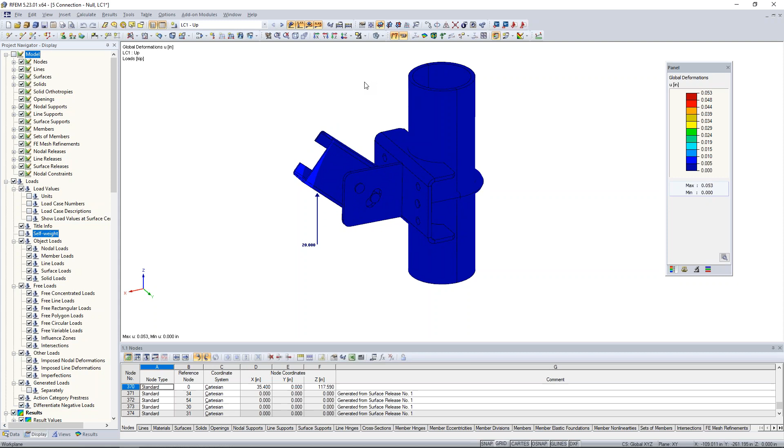In the event we need to reactivate that solid again, all we need to do is change the material model back from null to a material element, and then maybe modify these loads slightly, and you can rerun it with the double section shown. That's a great example of how we can use the null solid option, and that makes up a bulk majority of our example today.

I want to touch on a couple of the other solid types before the end of the presentation today. So we'll jump to another model here, and this will be an example of a solid gas element. You can see that this is an inflated foil cushion. These might typically be used on roof elements, for example.

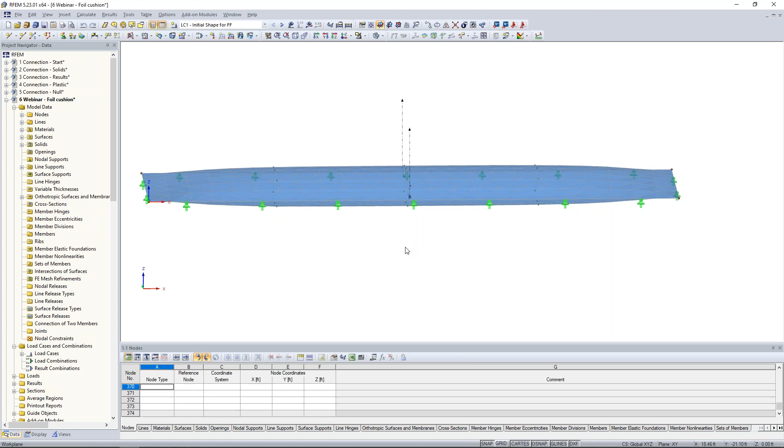This element is actually quite large, 40 feet in length and 13 feet in width, and the elements have already been defined here. One of my colleagues did a webinar completely devoted to this foil cushion and utilizing our form finding add-on module, so you can refer to our YouTube channel to view that, which goes much more into depth than what I have time to show you today.

Point being, we have a surface element at the top here, and our stiffness cannot be set to a null stiffness when we're defining a gas solid. The gas must be encompassed by some type of element. So for this, we have a fabric membrane defined with a membrane orthotropic material.

We're also utilizing our form finding module, which is used for tensile fabric structures. We can apply a pre-stress force, and the program will essentially utilize this add-on module to find the relevant shape based on these pre-stress forces. So that is the surface defined on the top, and the exact same concept applies to the surface defined on the bottom, another membrane orthotropic surface.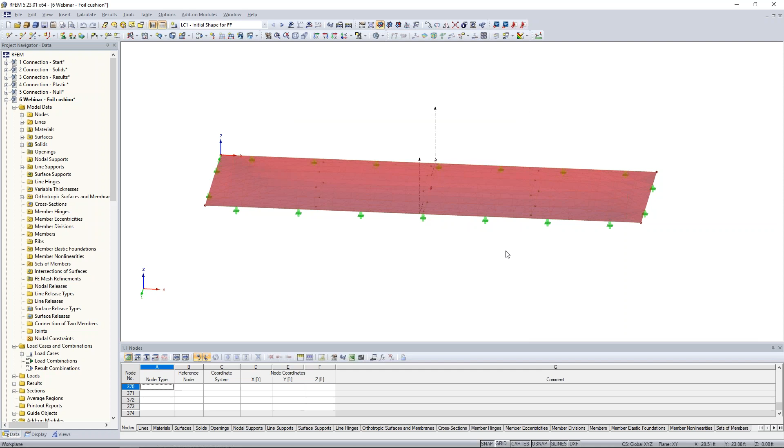Now what's interesting is that if we take a look here, we have our solid already defined, and this time the solid type is set to gas. You can see the material comes from our material database, which instead of filtering to steel, for example, we filter to gas. We have all of the relevant gases along with their gas properties shown within this table that you can select from, or you can always create your own.

In this case, we're using dry air. The second tab is where we will set the initial atmospheric pressure of 14.5 psi. The initial temperature is set at 74 degrees Fahrenheit. So that really makes up the solid definition here.

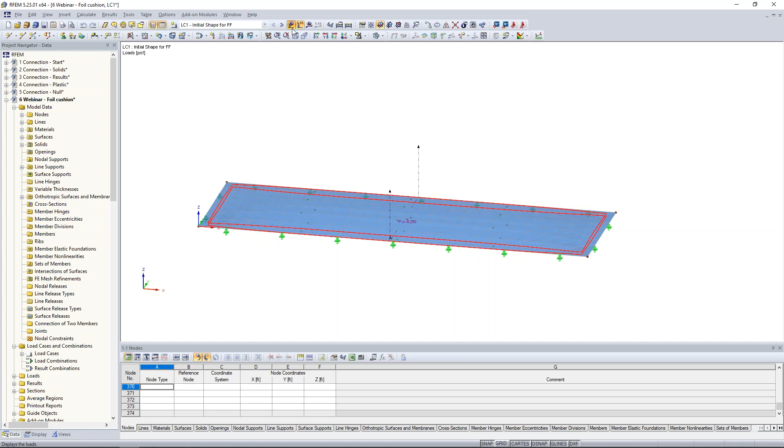Before we run this first load case to find the fabric form finding shape, I also want to point out that a solid load has been applied to this model as well. We can add in a new solid load from this drop down, and I can double click on it graphically here. You'll see that a solid load can be defined with the load type gas with a resulting overpressure, and then we apply the magnitude of 6.25 psf to the interior of these fabric membranes.

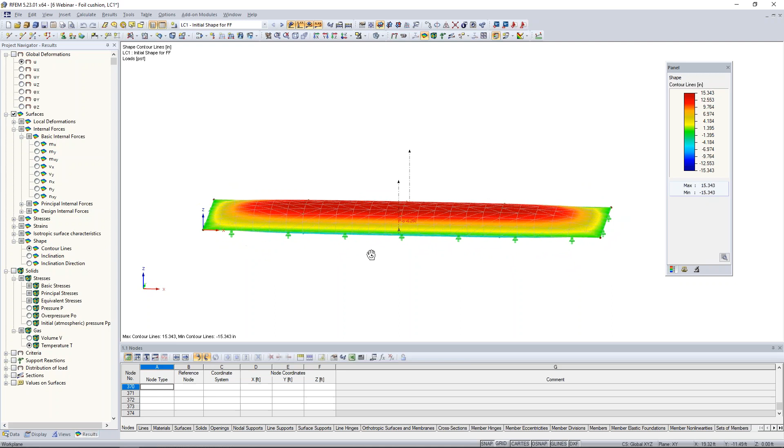So when we run our analysis, what we'll consider is the form finding shape from the pre-stresses. We're also considering the solid gas and the solid gas load altogether. So when we run our analysis, maybe initially we can view the contour lines of the shape just to see the nice contours that we would see with this inflated foil cushion.

But we're probably also interested in information such as our solid pressure. We can view the overpressure, for example. Gas volume is given to us here, as well as the temperature, but the temperature is just going to be that 74 degrees that we initially set it as.

So with these foil cushions, this initial load case is interesting, but we probably also know that it's going to be presented with some additional loading scenarios, such as snow load on a roof. So what we can do in this second load case is also add in a 10 psf snow load to it. So when we rerun this calculation, we'll now consider this area load on top of these fabric membranes.

We've also applied an additional solid load in the interior here, a little bit higher than what we saw with that initial load case. So now when we look at our results for the global deformations, we're seeing the downward deflection of our entire system.

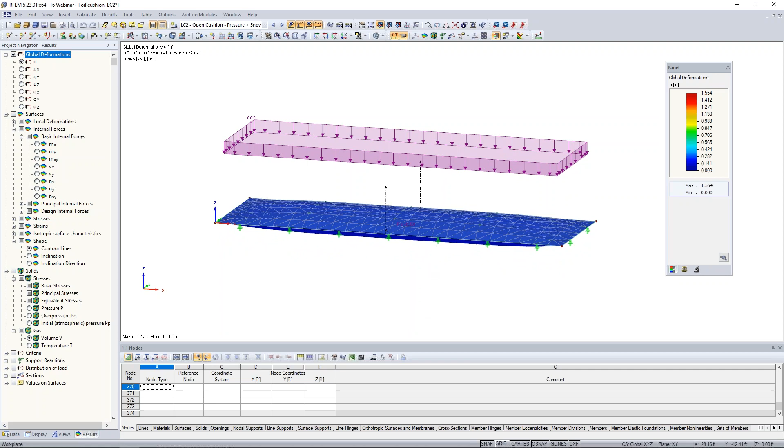What's important to note here is that without this gas solid defined, if we were to apply an area load, this would just be applied to the fabric membrane on top, and it'd probably pass right through the bottom fabric membrane. But as we have it defined now, we have this interior solid with gas properties, so both of these elements are actually deflecting together. Quite powerful, again, in how we can use a gas type solid.

So the final example for today is going to be a contact solid. For the sake of time, since we're almost out of time, I don't have the ability to model this one from scratch. I do have a previous webinar where I model a very similar beam splice application from scratch, so just shoot us an email after the presentation and I can point you to that. But really, I just want to give a quick overview of this contact solid.

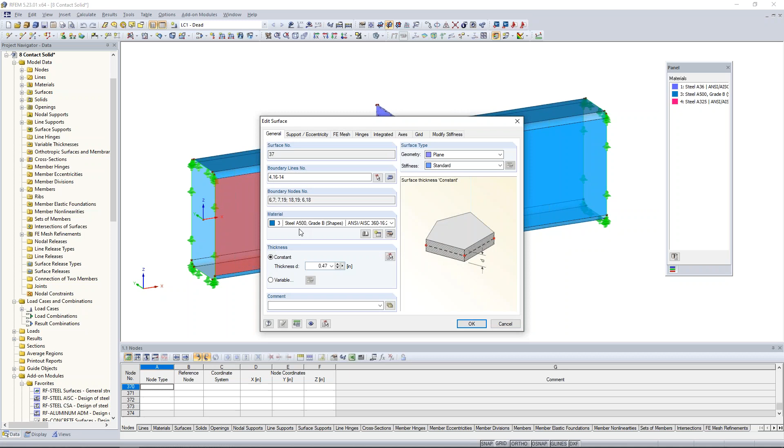So again, this is a beam splice. Over on the left-hand side, we have an HSS 16 by 8 with 0.5-inch thick walls defined. These are all defined with surface elements, so you can see the relative material defined here, the relevant wall thickness for these surfaces. It's also attached to a steel plate here, and this steel plate is a standard stiffness with steel A36 defined, with my thickness set at 0.25 inches. Over on the right-hand side, we actually have the exact same setup for an HSS member.

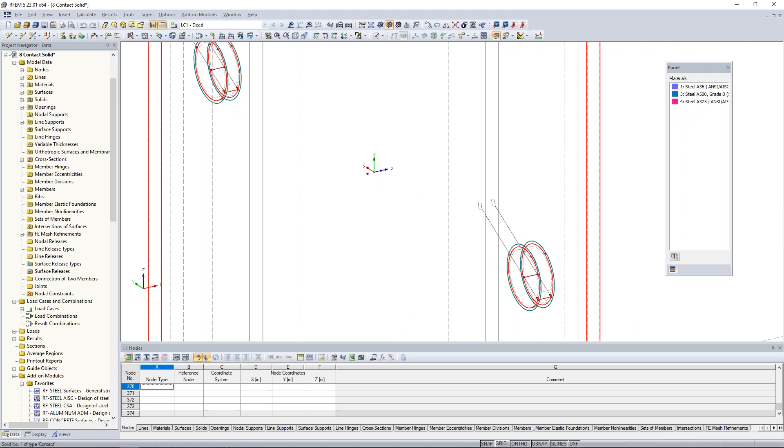It has its own steel plate defined here as well, 0.25 inches thick. So in between these two steel plates is where we would define our contact solid. Let me go to a wireframe view here, and I can double click on my solid that's existing between these two surface elements. You can see the solid type is set to contact.

Before moving on, let me quickly jump to the PowerPoint here just to explain a few important points about contact solids. The contact surfaces must be parallel and identical. What this means is that any nodes or lines that exist on surface A, and in our case that's the steel plate on the left, they must also exist on the right-hand side.

Everything must be identical. Surface boundaries must be defined with 4 lines - that means exactly 4 lines. It can't be defined with 3, it can't be defined with 5. If we have complex curved contact solids, what we'd want to do is break this down into multiple simple solids instead and apply all these same rules.

So going back to our example here, we can see under the second tab, the contact is between surface A, which I said is surface number 9. The program automatically detects surface B as 18. For this beam splice, I want the behavior between these two parallel steel surfaces to fail under tension. As far as the contact parallel to surfaces, you can see we have many different options, including rigid friction and elastic friction. I'm going to set this to failure if the contact perpendicular to the surface fails - so this is for my shear behavior. It'll simply fail if we have failure under tension as well.

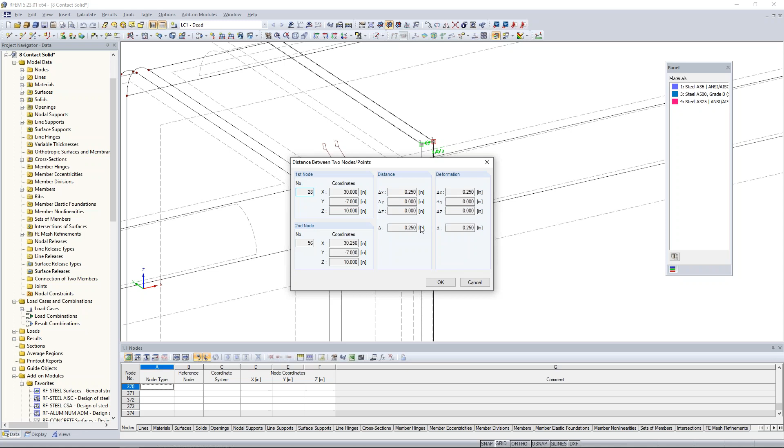Once this contact solid is defined, a couple other things to note: the exact depth of this contact solid is really important. I can use my measure tool here to measure the depth of this solid between the two surfaces, and it's 0.25 inches. The exact depth should be half the thickness of surface A plus half the thickness of surface B. In my case, both surfaces of these plates were 0.25 inches, therefore my contact solid should be 0.25 inches. That's really important in order to replicate these surfaces essentially lying flat against each other.

Now, the other final thing to note is that these plates are going to fail in tension, so we need something to hold them together. I have modeled some typical member elements here as beams, and these are circular steel sections with a 1-inch diameter to represent my bolts.

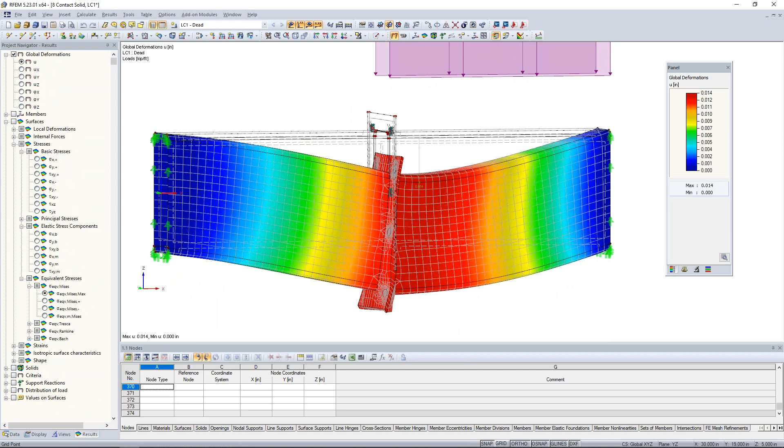So these bolts should take over in tension when the plate elements fail. We can apply our first load case here, which you can see is some simple line loads along the walls of this HSS member. When we view the deformation, we should see some strange behavior at the bottom. What will help clarify what's going on here is under the display tab, we can activate this option to remove contact solids from display.

So when we're looking at the deformation, it's quite apparent where our plates are failing in tension, and those bolt elements are holding those two elements together. But up here at the top where we have compression, we can see those plates acting together because they are working with full force transmission.

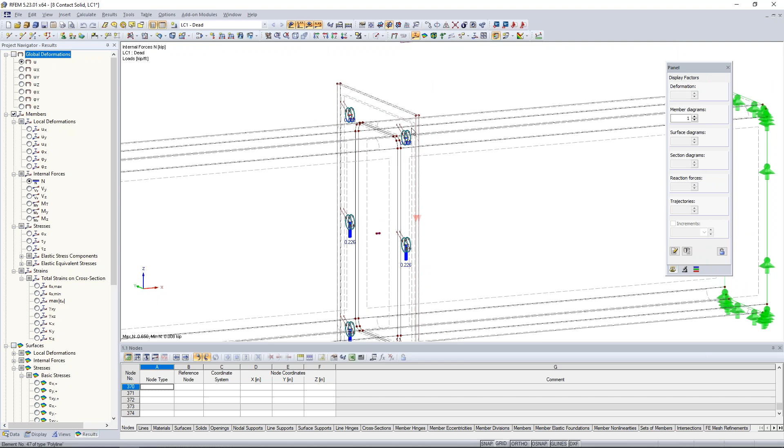So under the results tab, we can also expand out the members option, and we can actually view the tension forces as the normal axial load in these small bolt elements. As we'd expect, we have a higher tension load for those bolts at the bottom, and as we move up the plate, a much smaller tension load, if any.